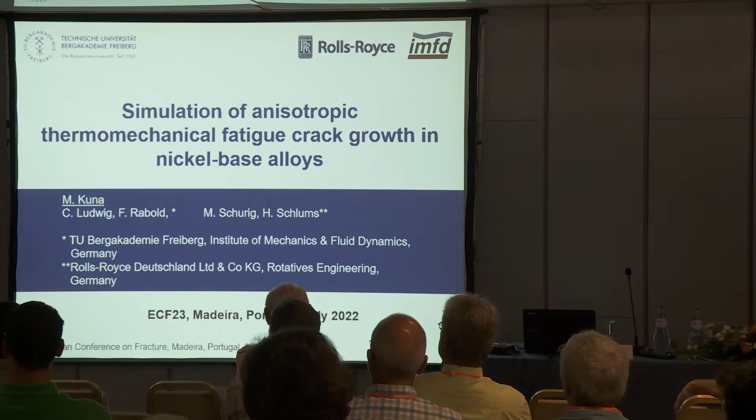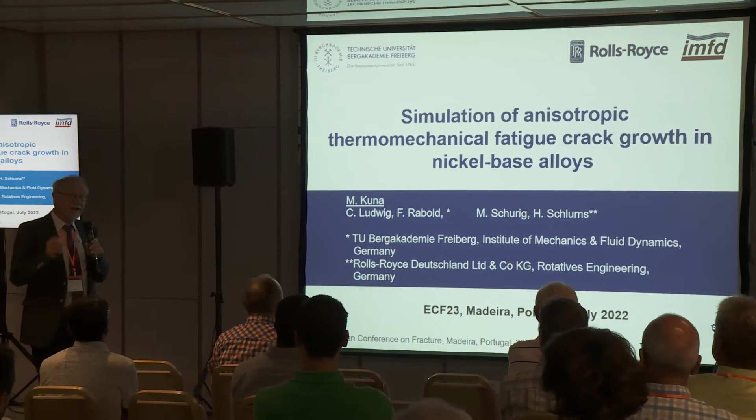I have chosen a topic which I found very interesting and which has not been so dealt with in the literature up to now, both from a fundamental point of view and also from practical aspects. This is the anisotropy of crack growth.

We studied this in a project together with the Rolls-Royce company in Germany. It is a nickel-based alloy and thermomechanical fatigue crack growth. I want to introduce my co-workers.

Dr. Ludwig did the main work. Mr. Rabold developed our code ProCrack for automated 3D crack growth. And from our partners at Rolls-Royce Germany, Dr. Schurig and Dr. Schlums cooperated in this project.

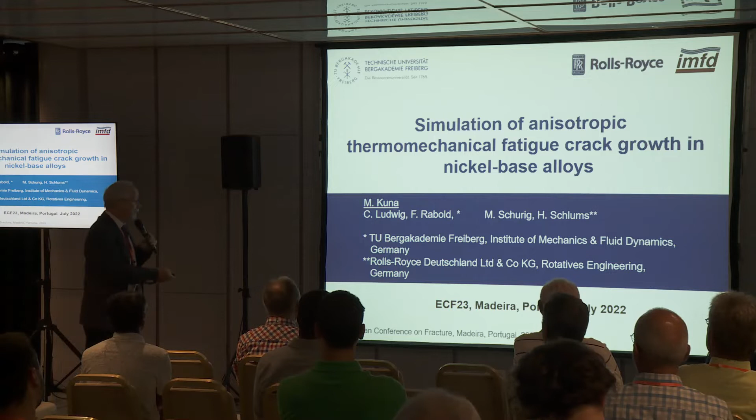It doesn't work. Is it on or off? Okay, fine.

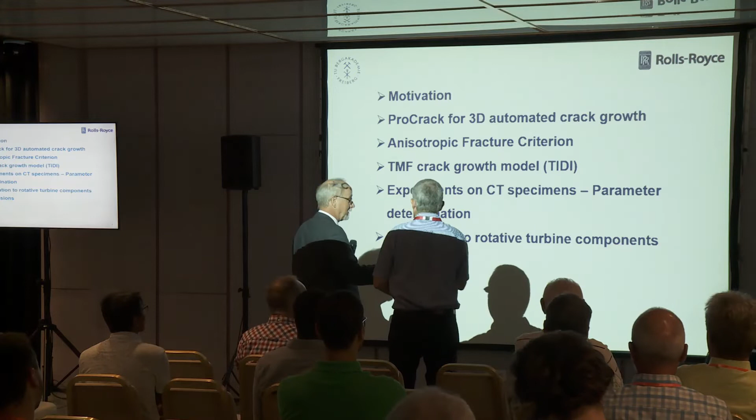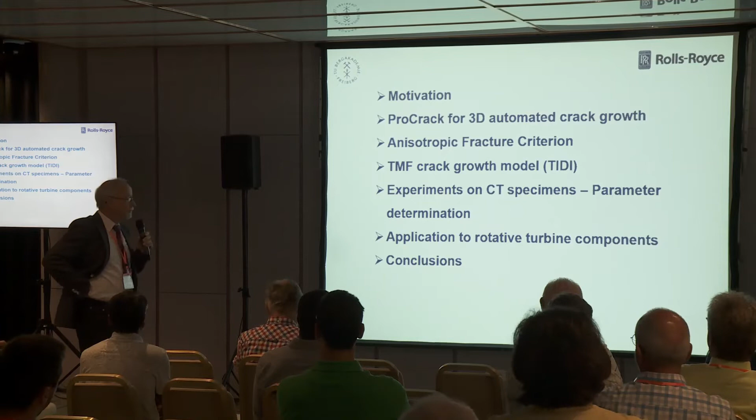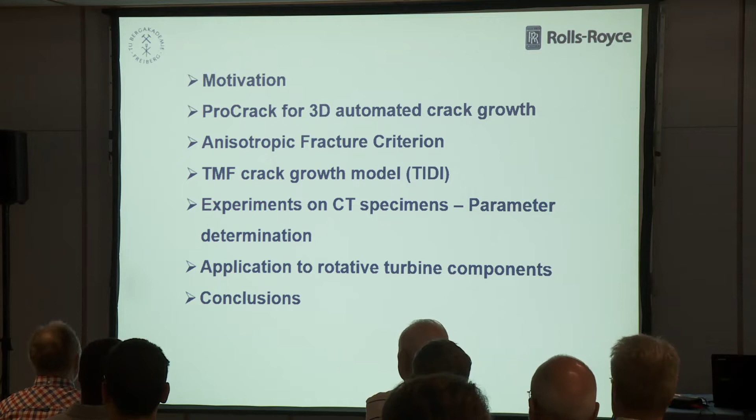I want to bring a motivation at first to introduce this specific problem, and then shortly recap our finite element code ProCrack, which is able to simulate 3D fatigue crack growth in an automatic manner. Then I come to the very topic, the anisotropy of the fracture behavior in this special alloy, and we have to combine it with the TMF crack growth law established at Rolls-Royce. Experiments have been done on CT specimens, and we could simulate them to verify and identify the parameters of our model. Finally, we applied this model to a typical component of a jet turbine rotor. And then I close with conclusions.

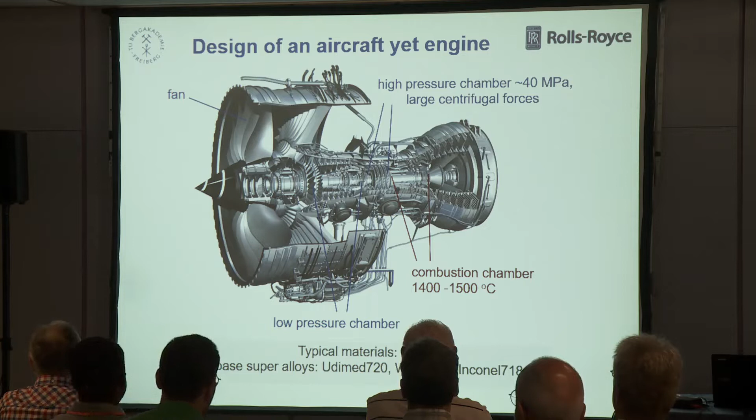The design rules say if any blade would break, it must be contained in this jet engine—it must not penetrate the casing and fly into the fuselage to destroy the aircraft or damage the passengers. But these discs are so heavy and have so much kinetic energy that if they break, they cannot be prevented from crossing the casing.

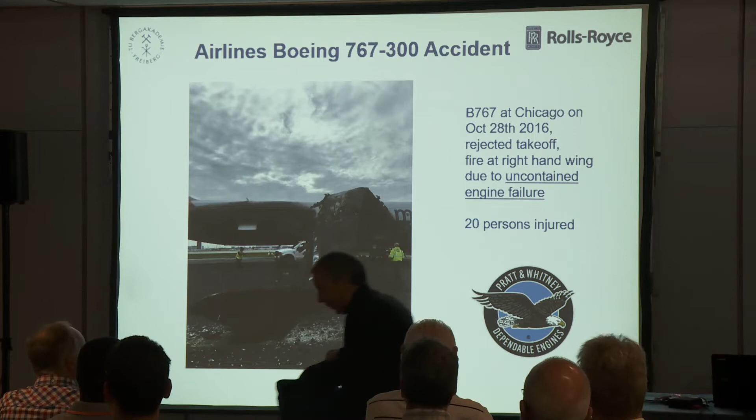And this happened in 2016 at Chicago Airport with a Boeing machine. It was just going to take off, and then the engine failed—a so-called uncontained failure. The engine caught fire, and the whole right wing burned down. The passengers could be rescued, fortunately. My colleagues from Rolls-Royce asked me to point out that it was an engine from their competitor in America, Pratt & Whitney, not to mix it up.

So what was the reason? It was a failure of such a disc. It started as fatigue from a small internal inclusion, growing up, and then there was a final fracture, and it broke in several pieces with so much kinetic energy that parts of them flew away through the casing, one kilometer away, and landed in a UPS warehouse near the airport. They destroyed the wing and not the fuselage, and so it started to burn.

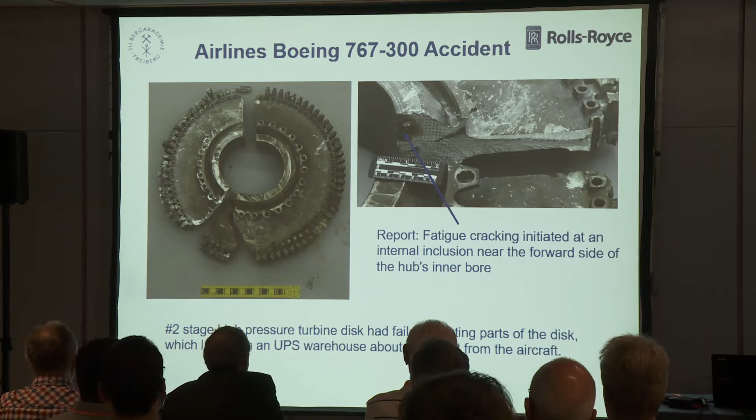So if you look at the loading for such, this is a segment of such a disc. Due to centrifugal forces, here at the borehole, it has to withstand high tensile strength, and all this is thermomechanical and mechanical cycling, so it needs high low cycle fatigue resistance. Contrary, here at the top where the blades are attached, we have very high temperature, and we need high creep resistance. So these materials have to have all very good properties, a combination of high strength, damage tolerance, creep, and oxidation resistance for these rotating parts.

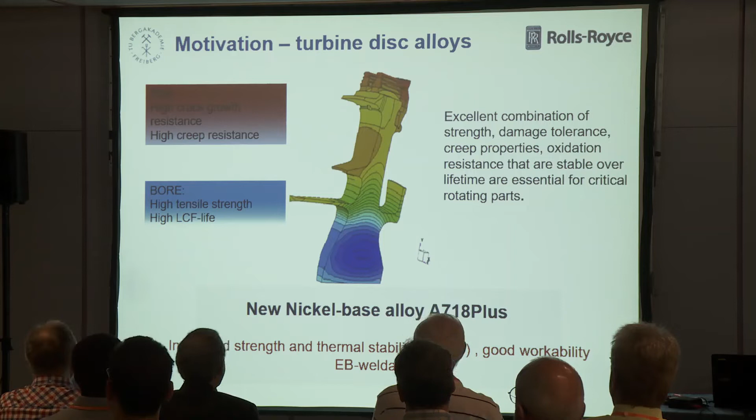Rolls-Royce developed an enhancement of Inconel 718, called A718 Plus. It has better strength, higher thermal stability, good workability, and can also be welded. So this is the good side, but this material has an anisotropy.

If you make a fracture test in mode 1 with a CT specimen in a cyclic experiment, a TMF experiment, then the crack deflects from the symmetry line. And this was a shock for the design engineers, because all their rules to predict or design these components are no longer valid. You didn't know where the crack will go and when it will start.

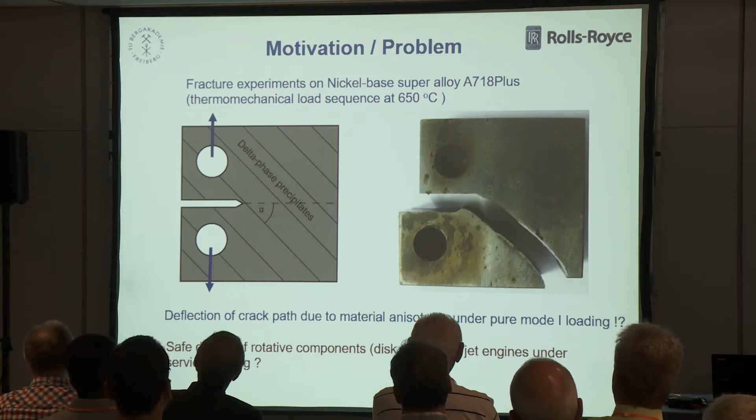So it needs research. The reason is, I'll explain it in a minute, that we have some lines of delta phase precipitates, here with an angle alpha. Here you see the microstructure. The white lines are these precipitates. These are delta nickel niobium precipitates, formed during the forging process of the material along the forging lines.

So if they made a fatigue test at circular corner crack specimens, with 120 seconds dwell time at 650 degrees, R ratio of 0.1, these are the crack propagation laws. They cut the specimens in different directions. The zero direction is more or less parallel to these precipitates, and here the material behaves very weak, with a very fast crack propagation rate - these symbols, the red line.

Contrary, in the two opposite directions, 90 degrees here and 90 degrees here, we find this crack growth rate, which was about 2 orders of magnitude lower. The supplier gave this green line, but it is worthless in view of the differences.

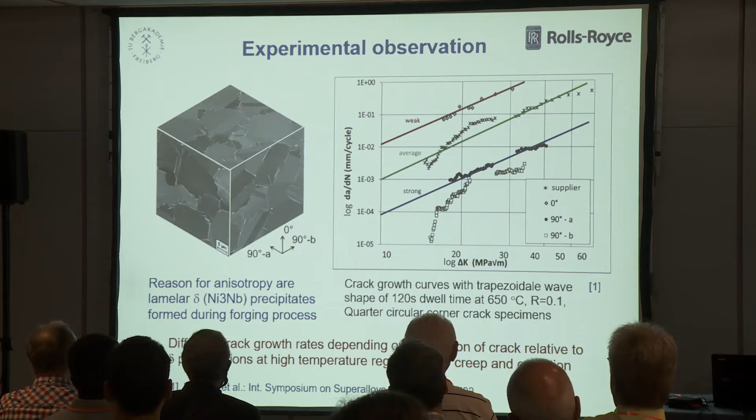So here, this schematic sketch shows maybe more insight. This is a so-called weak direction, parallel to the precipitations. The crack growth rate is great compared to the other direction. Here, where this direction and this direction, the crack has to intersect these hard delta phases. And we define these are about the same, so we can define one weak direction and two strong directions, perpendicular.

So this is clear. Now we need a new criterion for the deflection - where does the crack go, in the real structure. The next is how to incorporate it in the fatigue crack growth law. And finally, they wanted to have a numerical tool to predict this behavior in a real component.

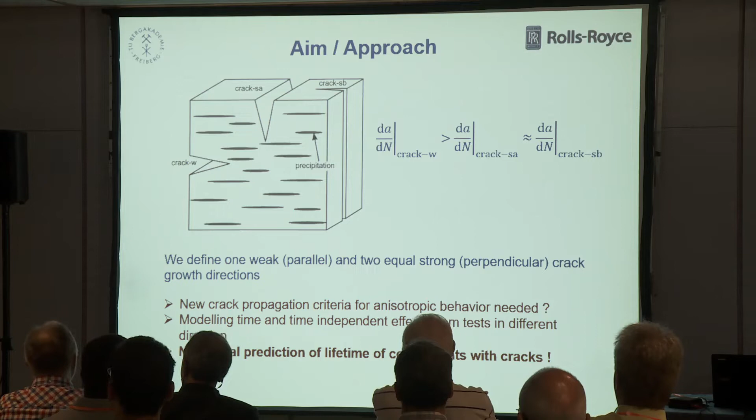So I start with the last, with the software simulations. I'll shortly recap our code ProCrack for automatic 3D crack growth simulations. It has similar features and performance to, you know, Franc3D or ZenCrack or ZCrack or BEASY. We rest on linear elastic fracture mechanics, 3D with all modes mixed, and we perform an incremental analysis of crack extension by finite element meshes.

But we have some special functions. First, we work only with Abaqus as a computing horse, so to say, and around it we formulate a collection of Python scripts. We use a submodel technique to calculate the k-factors very accurately, and for the separation of the modes we use the interaction integral, which is implemented in Abaqus.

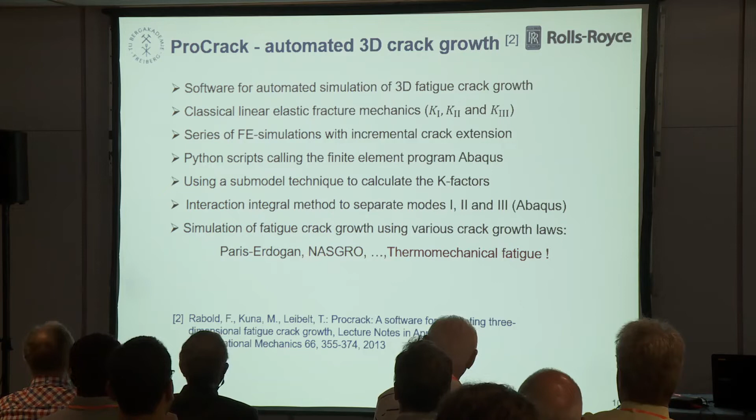Now, for fatigue growth, the exact computation of delta K is very important, because it goes to the power of n. Until now, we have implemented the classical Paris-Erdogan and the NASGRO equations, but now we have to extend it to this thermomechanical fatigue. So this is a short overview of the flow chart.

What is in red is added by us, the functions, and black is what we use from Abaqus. So we start with usual input data of the structure with the crack geometry, loading, material parameters, and some control files, and then generate by Abaqus CAE the global FEM model of this cracked component. Then it is analyzed, and from this result we cut out a submodel of the near crack environment. This is again transferred to Abaqus to calculate now accurately the fracture parameters, and then we make decisions. Here's this decision block - if we have arrest or critical crack growth, and then we compute the new crack coordinates, check against failure, and then we adapt the shape of the crack and continue in this loop.

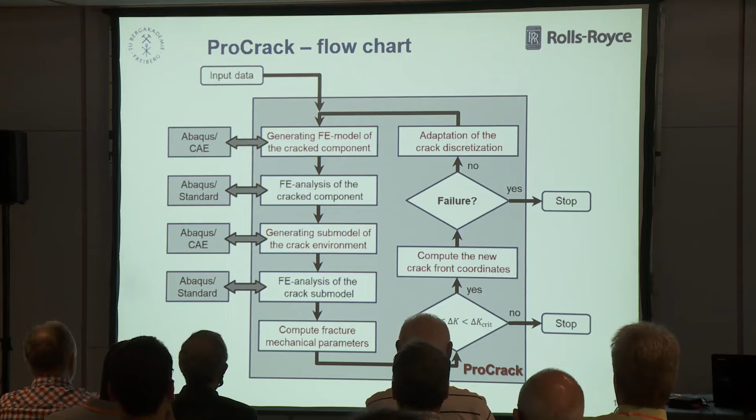Here you see an example. This should be the global structure, the model which we can automatically mesh with tetrahedral elements, with a semi-elliptical surface crack. Then we cut out a submodel, which is a tube-like structure with fan-shaped hexahedral elements and special crack tip elements.

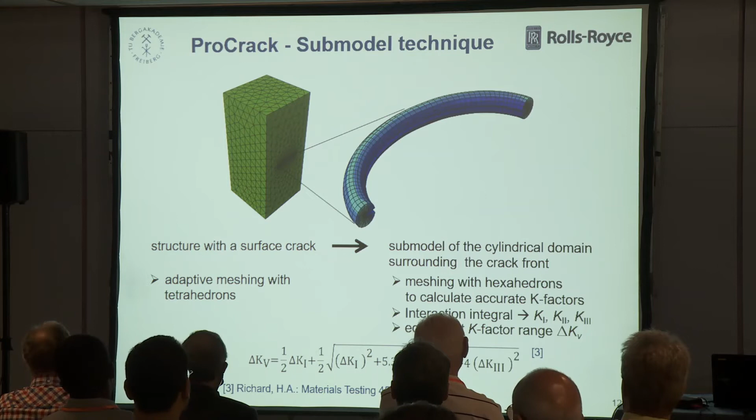That's a crack tip, and this is run again, and we get the K-factors. Since we have mixed mode, we have to define an equivalent K-factor range for mixed mode, and here we adopt this method from Richard.

We see our initial example, initial crack face, two steps of crack growth. We describe the crack growth by geometrical issues, these facets, not by the element mesh itself. So it is later meshed. We have the freedom of meshing it.

This is the current crack, and we have several points here. At these points, we have to decide where the crack goes and how much it goes, from our fracture mechanics criteria. The deflection out of plane is controlled in this code by the maximum stress criterion.

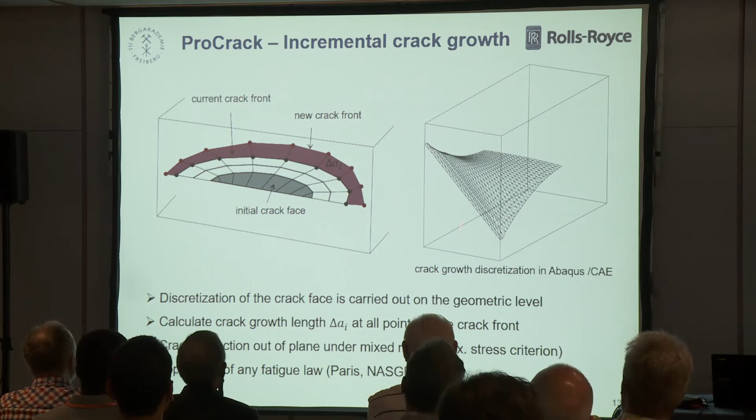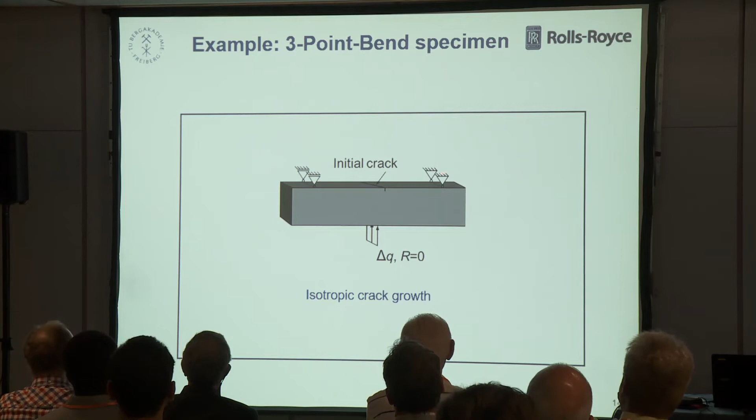So here you see how the curved crack form can evolve for this example. It is a classical benchmark problem for such cases, a 3-point bend specimen, which has a crack inclined to the bending axis by 60 degrees. It starts from this inclination, and if you see this simulation, this is a global mesh.

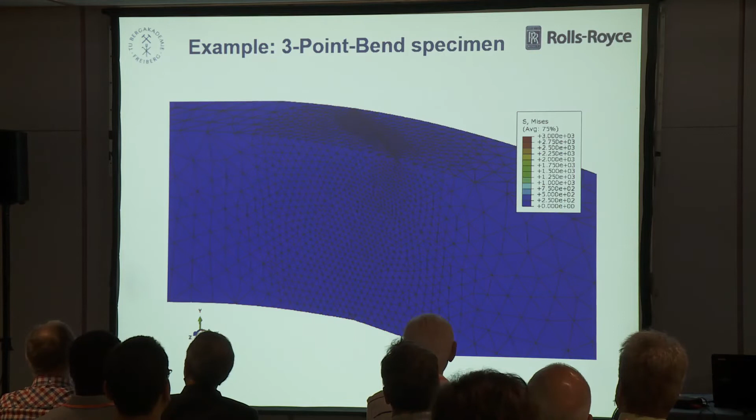The crack turns into the direction of the symmetry line, so perpendicular to the maximum principal stress. So it wants to find mode one solutions. These are the stresses.

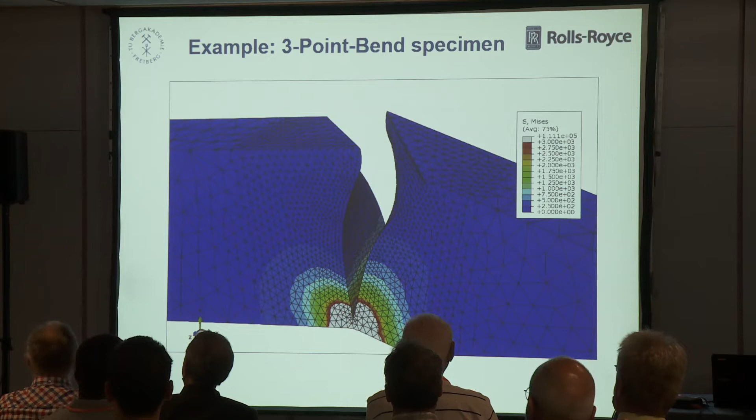We have applied this code to many industrial partners, for wind turbines, for automotive industry, for Siemens Energy, and so on. Last year, one student made a master thesis where he compared our code with Franc3D, which is, so to say, the standard. This is one example from this.

Here's a so-called NASA Lewis spur gear. It is a gear, and the teeth are cyclically loaded. Here at this notch, the crack would start. The question is, where does it go? It depends on the thickness of the rim compared to the tooth depth. For this example, it goes in this way.

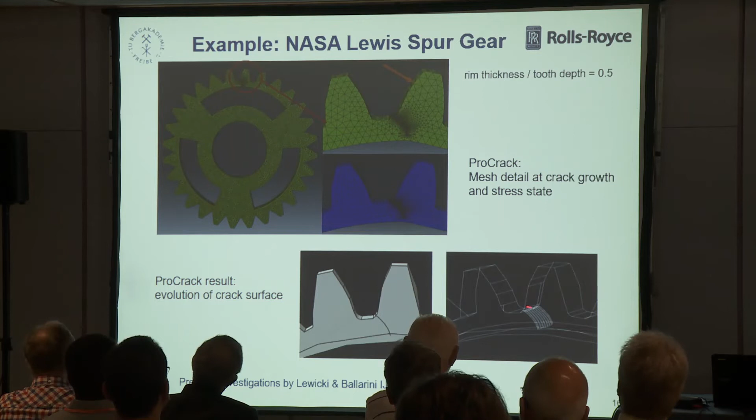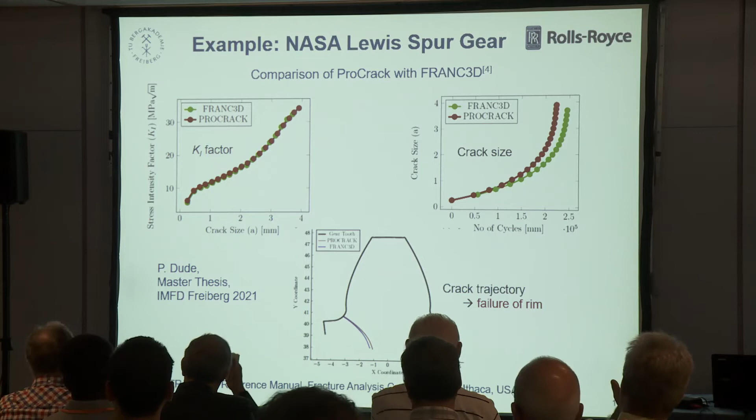But this results in a fracture of the rim, which is most detrimental. If the tooth would break, it would be better. So thanks to Mr. Dude.

So now let's come to the problem. I recap the isotropic criterion, the maximum principal stress criterion. Everybody of you knows it. In 2D, we have the circumferential stresses, sigma theta theta, and a radius r around the crack tip.

They can be described by the K factors in this well-known formula. The maximum principal stress criterion says that the crack goes in the direction where sigma theta theta has its maximum, for an isotropic material.

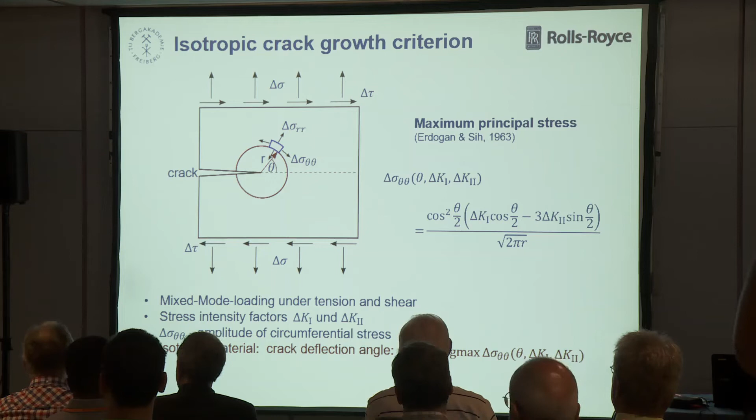Isotropic deformation behavior and isotropic crack behavior. Our material is isotropic in the elastic behavior, but not in the fracture behavior. So I looked into the literature for what has been investigated for anisotropic crack growth. It is not complete, but most work is done on composite materials. It's clear, composite materials have this anisotropy in crack propagation.

The first were Buczek and Herakovich in 1985. Then Carloni and Nobile applied the strain energy density criterion, redefined the MTS criterion, and Judt and others used the J-integral vector. This is all 2D linear elastic.

The only 3D work I found is a PhD thesis of Pettit at Cornell University in 2000. None of this literature deals with thermomechanical fatigue and creep. So we had to find a new criterion.

Our idea is the following: the crack goes in the direction where it has the highest stress compared to its resistance. So we form a quotient between the applied stress—this is the same circumferential stress I showed in the previous formula—and this function which represents the resistance of crack growth in every direction around theta. When this ratio has a maximum, the crack will follow this direction, so loading compared to resistance has a maximum.

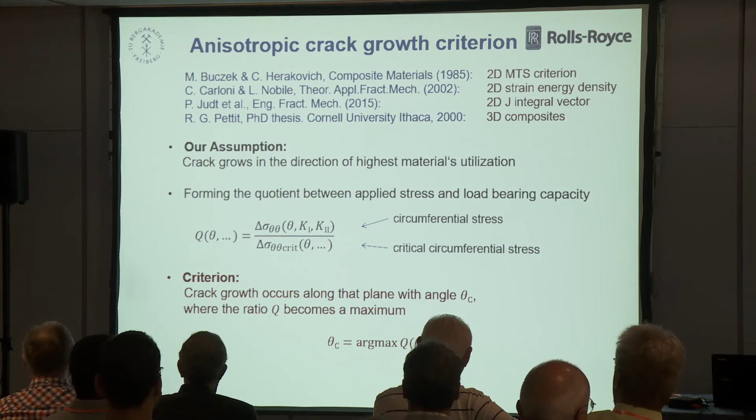So in our case, it is 3D, it's a little bit more complicated. Here we have one point of the crack tip.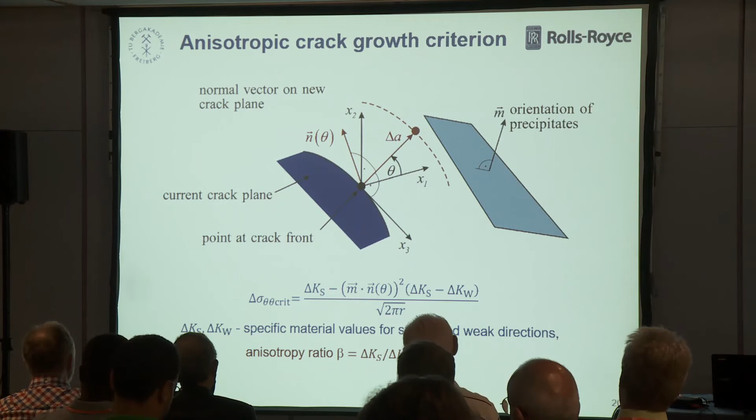This is the formula. If we consider the simple cases here, where the crack goes parallel to the precipitates, m and n have the same direction, the scalar product is 1, and we arrive that the critical stress is exactly this value for the weak direction. Contrary, if we have the other two directions where n and m are orthogonal to each other, the scalar product is 0—or here it's orthogonal but out of plane, it's also 0—so we arrive at a strong value. But importantly, in between, for all other directions, this function interpolates.

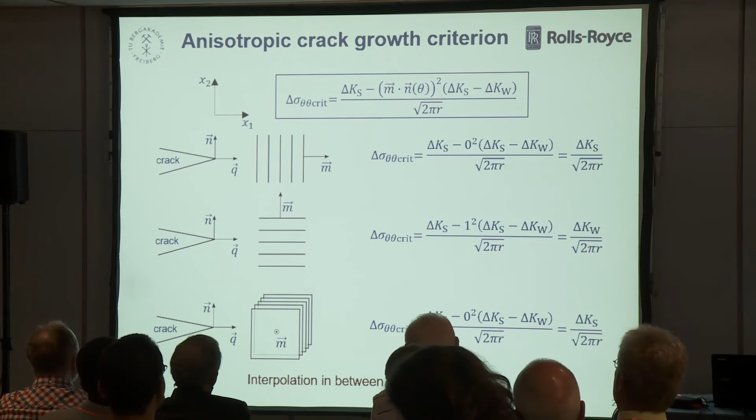Now we have another complication, because the orientation of the anisotropy is not unique in the whole structure. There's no homogeneous anisotropy, it is heterogeneous. Due to the forging lines—you see the forging lines, the piece is forged, and then from there the wheel or disc is machined—we had to use an additional data file to describe the shape of these lines and always the normal vectors.

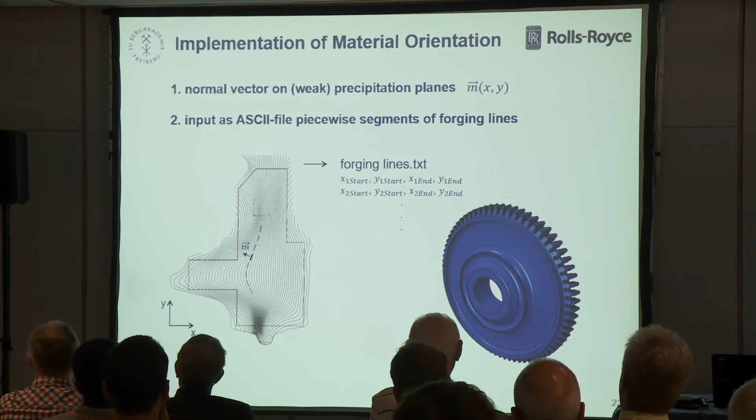This term describes the time-dependent part due to oxidation and creep. The kernel is an Arrhenius function with this activation energy and coefficient, clearly temperature dependent through this function T, temperature over time, and also this exponent of time. And these two coefficients, A and B, are orientation dependent. Temperature dependence is introduced here and here.

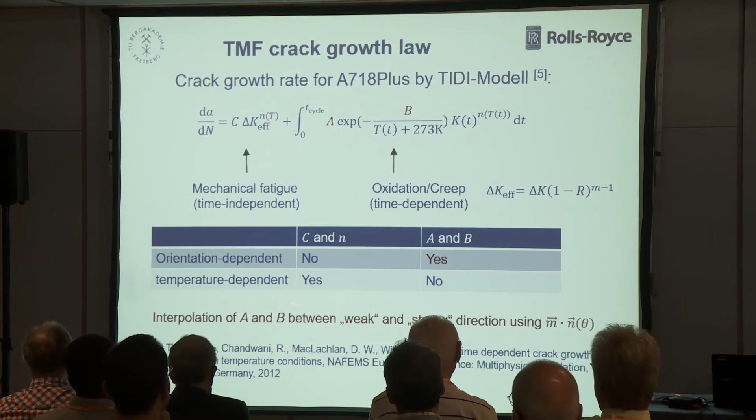You see the loading is described by the absolute value of the K factor. So we consider small scale creeping—creeping is controlled by the K factor, the small creep zone. And for these parameters, we also need to interpolate along the different directions. This second integral has to be integrated—I'll skip it, it's a numeric thing.

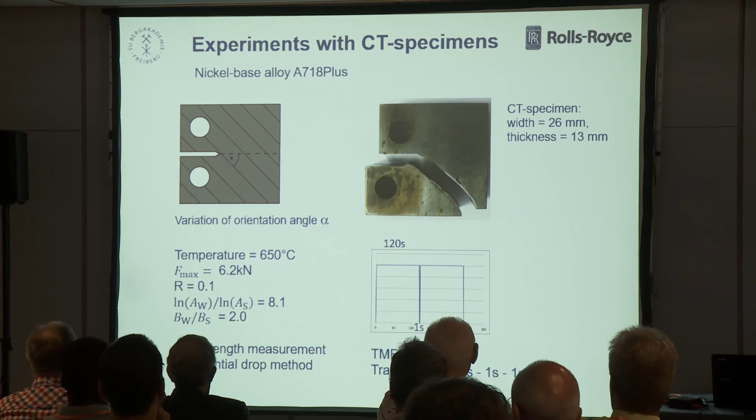Now let's come to the experiments. Rolls-Royce conducted experiments where they cut CT specimens out from this forged piece in different orientations, with different angles alpha with respect to the crack. This was TMF experiments, 650 degrees up and down, and an R ratio of 0.1. From the corner crack specimens, we have the parameters A and B for the two extreme directions. Crack length was measured with a potential drop method.

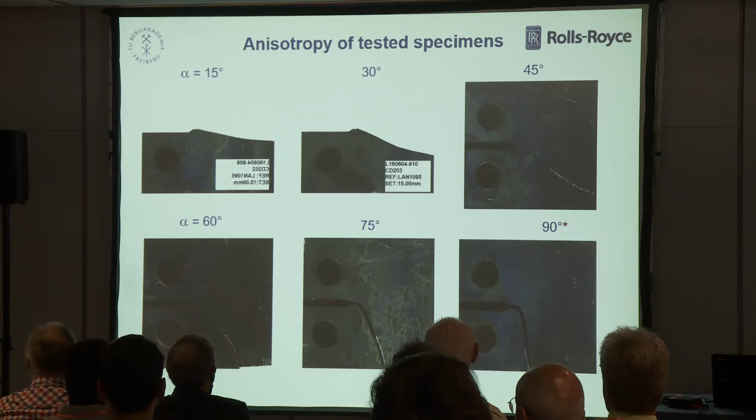Here you see the results for different inclination angles: 15, 30, 45, 60, 75, and 90 degrees. The crack turns a little bit, but parallel to the alignment of the precipitates, and finally it follows it. It's really a strange effect, under mode 1, also macroscopic mode 1 loading, locally.

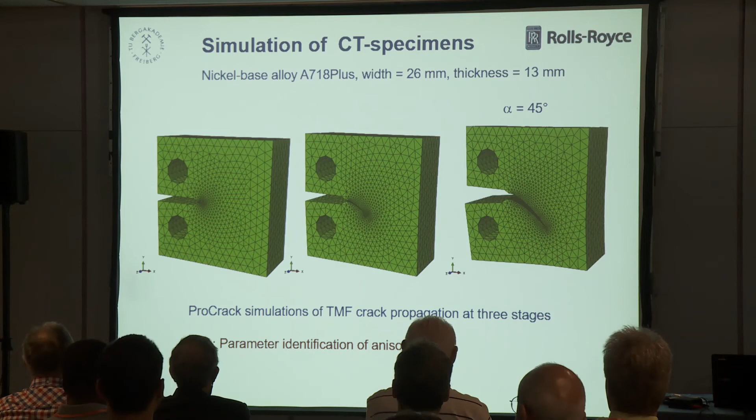So we have now simulated it. You see some stages of simulation for alpha 45 degrees. This is an example—you see here the stress. Nothing special. So now we need to identify the parameters.

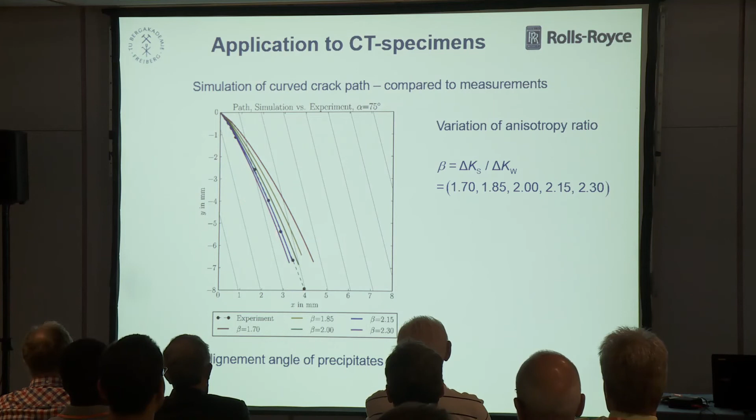And now we did it for all angles, and found that the experimental dots and our simulations of the crack path agreed best with a fit of beta equal to 2.

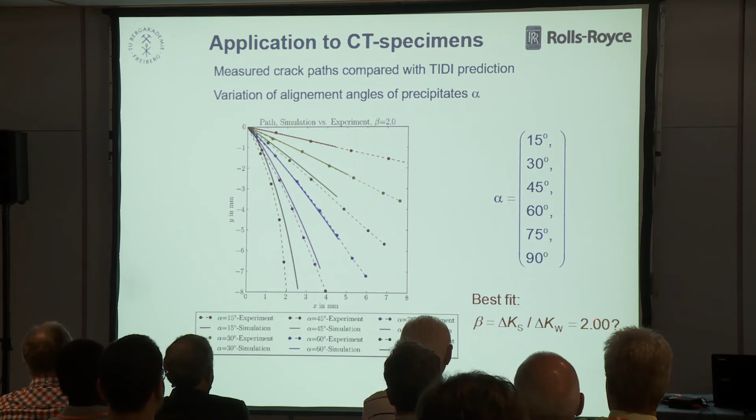So we have determined all parameters for the crack deflection. Now the next point is how fast the crack goes.

We compared experiments here for alpha 15 and alpha 75 degrees. The red dots are the experiments, so da/dN over the number of cycles, and the green lines are our simulations. For alpha 15, the crack very fast follows the new direction after about 20 cycles. For the hard declination, the crack needs many cycles to find the direction, but then it goes very fast.

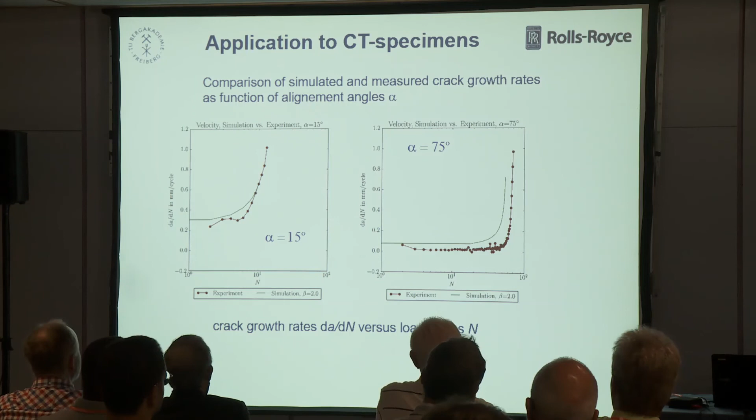So now we have all in hand, and wanted to make an application example for such a disk. Here you see a sectorial segment. We cannot calculate the whole disk, only the sectorial segment. Here the blades are mounted by the so-called fir trees. We have only dummy blades here with equivalent weight. What is detrimental if such a fir tree would break? Then the two blades fly away. So we assume a crack, a corner crack, at the edge of this fir tree.

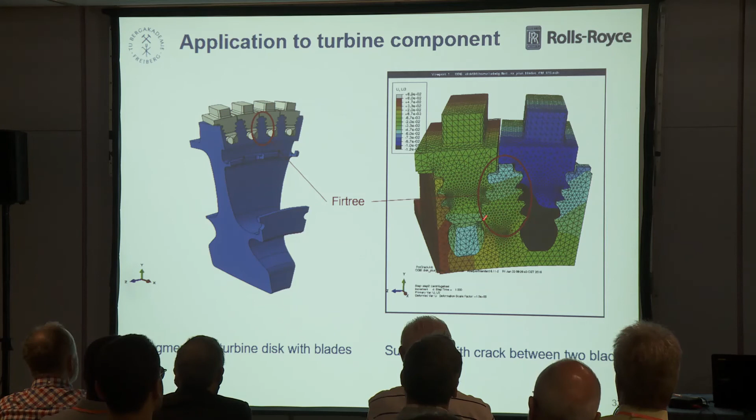Now we made again a submodel. Here two blades, and this is a disc, and here this fir tree. Here you see the deformations. This is a submodel, and now we start our crack work.

First we need the loading. The loading was a typical flight cycle. Here you see the stresses versus time. It is about 2.5 hours flight, starting with take off, climbing, cruising, approaching, landing, and thrust reverse. It is a stress, and this is the temperature in this structure.

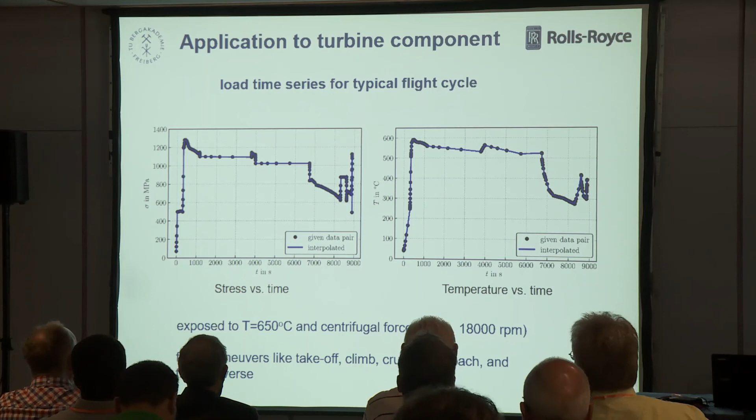So here you see the results. These are the initial corner cracks. Left hand is for isotropic crack growth assumption, and the right one is for the new anisotropic. Here you see the evolution of cracks, and in this transparent view you see it better. Each line here is a crack increment step in the numerics. Here we needed 19, and this corresponds to about 11,000 flight cycles.

With isotropic assumption, the crack fairly follows a direction perpendicular to the maximum load, the centrifugal forces. Whereas for anisotropy, and the platelets are aligned in this direction, the crack will turn its direction more or less parallel. You see it here and here. We could also simulate only 4,000 flights, and the crack attained already this size.

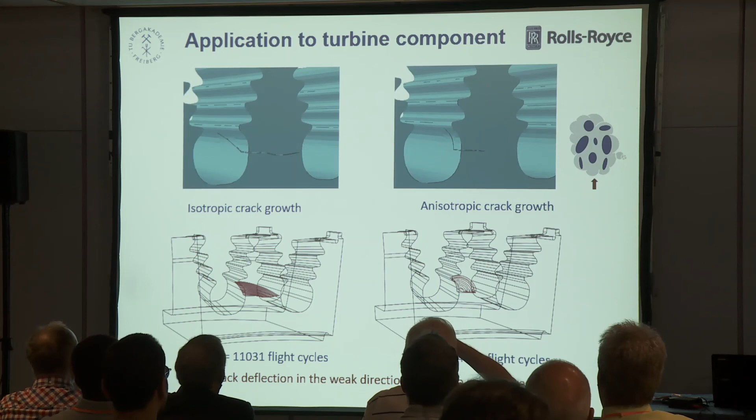Okay, these are the conclusions. So we developed a new fracture criterion for the crack growth direction in an anisotropic material. I think this is not only restricted to this nickel-based alloy. If you have another anisotropy material, composites, or what is now in additive manufacturing, we have also clear anisotropy in the direction parallel and perpendicular to the processing, or in rolled sheets. So we can use it.

This criterion was implemented in our code ProCrack, and also the TMF crack growth law was especially adjusted, and we could verify or identify the parameters for this new criterion and crack growth law by means of specimen experiments, and finally apply it to the TMF from the special turbine component.

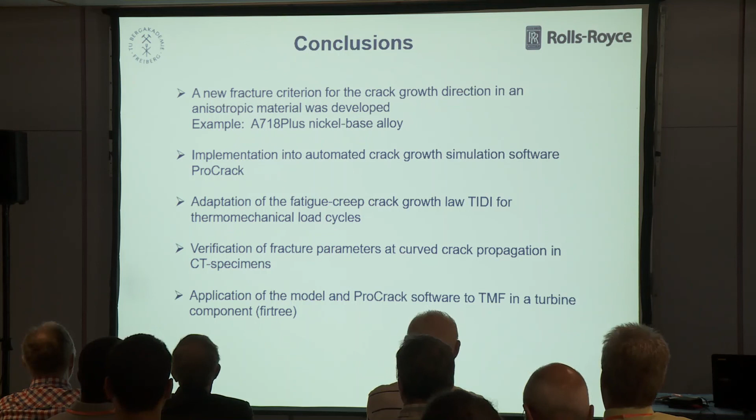So its outlook: what I've shown here now is all resorting on linear elastic fracture mechanics, delta K and K. In the case if the plastic zone becomes larger, with more deformation and creep, and more extended plastic zones, it would be no longer valid. So we develop at current an extended version of ProCrack.

It's called ProCrack Plus. Mr. Garnish has reported here in this conference on Monday, and this is now capable to tackle these large inelastic deformations. It means the plastic zones have to develop and be carried on with the propagating crack, and is especially devoted to LCF and TMF applications.